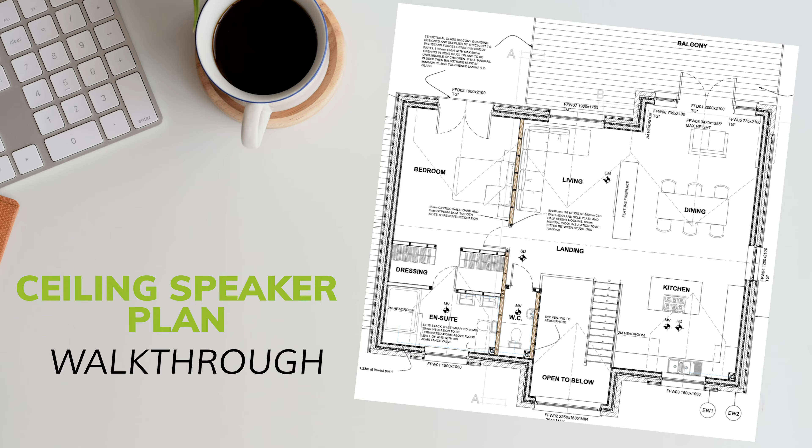So I've got an example floor plan here that is of a real client's proposed property, and I'll be speaking out loud my thoughts and recommendations for each room and give an explanation as to why I've recommended that. So hopefully you can learn a few things along the way.

From a general perspective, the client knew that they were after a Sonos system, as they were already familiar with how the ecosystem works and they'd like to continue with that. When you're looking to use ceiling speakers with Sonos, you'll need to power the ceiling speakers with Sonos amps.

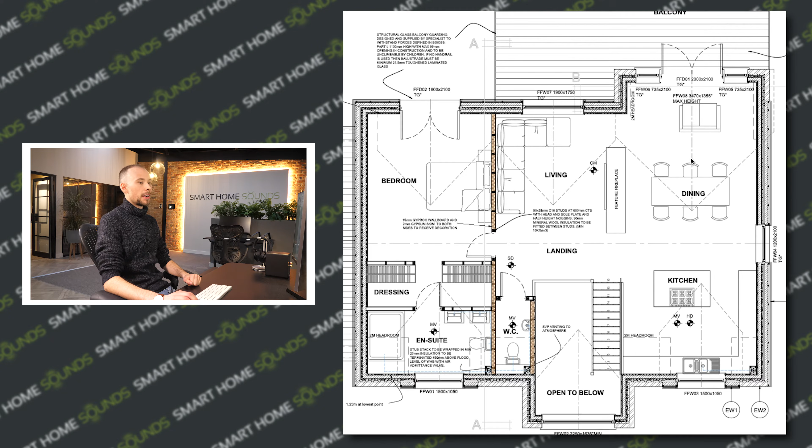So if we look at this open plan area here, you can see that it is sort of split into three different areas. For the majority of the time, we recommend having a dedicated pair of ceiling speakers for each area. For larger open plan areas like this, where there are different elements of the same room - like you've got a kitchen area here, you've got a dining area here, and you've got a little seating area here - we tend to recommend having a dedicated pair of ceiling speakers for each area, because how ceiling speakers work is that traditionally they're sold in left and right stereo pairs, so you normally buy them in pairs. And we tend to focus the positioning of each pair of ceiling speakers over the furniture, how the furniture is laid out in the plan.

So if we look at this plan, you can see we've got a little kitchen island here. So what I would tend to say is, let me just get my little blue circles out - I'll change that to blue, so I just love blue.

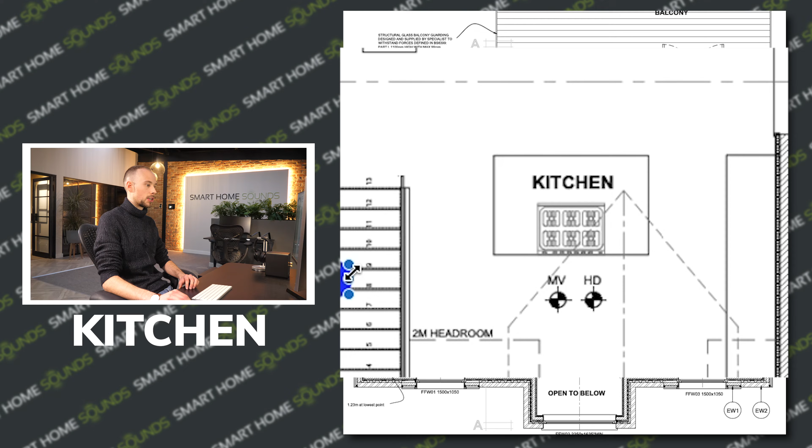Make that a little bit smaller. I tend to recommend positioning speakers just either side of the kitchen island if you have one. So I'd do one there, and I'll just copy that and put one the other side as well. That means whenever people are cooking, or maybe there are some bar stools, you'll always get a left and right stereo separation effect, which is handy because you'll be hearing different instruments and that sort of thing.

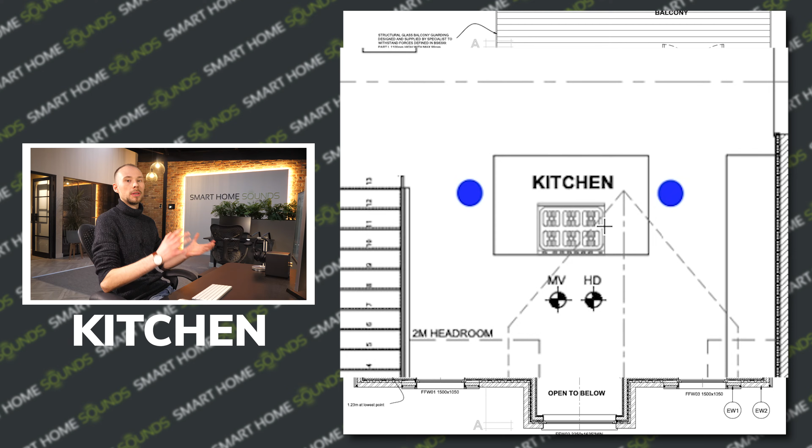So that's what I would do for the kitchen. Moving on to the dining room, it's quite similar to how the kitchen is. I'd recommend putting a speaker either side of the dining table, so the width of the table, so the majority of people, well in fact everyone, will be able to hear the left and the right equally. So it's going to be a little off center, but that doesn't matter too much.

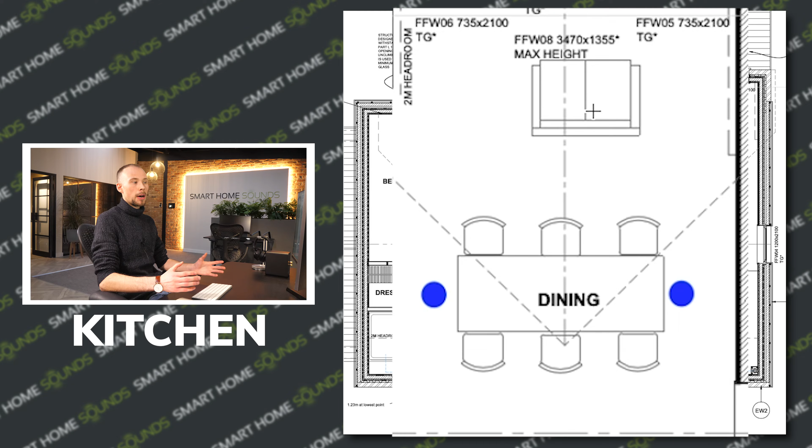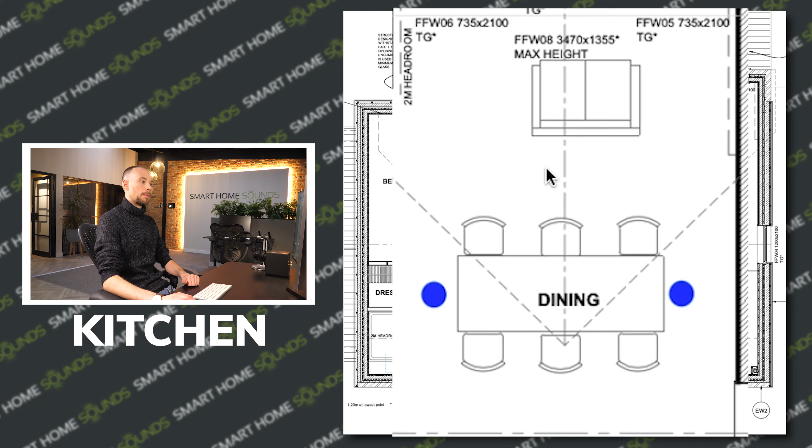The client didn't really need anything in the seating area. But what is good to point out is that if the client did want another pair of speakers here, you can run up to 6 Sonos in-ceiling speakers on the same Sonos amp. But if you use different brands of ceiling speaker on the same amp, then you're limited to 4 ceiling speakers. So that would have been a benefit. If the client wanted 6 ceiling speakers, Sonos ceiling speakers would potentially work out more cost effective, because they can put all 6 on the same Sonos amp without having to split it up into 4 on one amp and 2 on another. And the amps are $599 each after all.

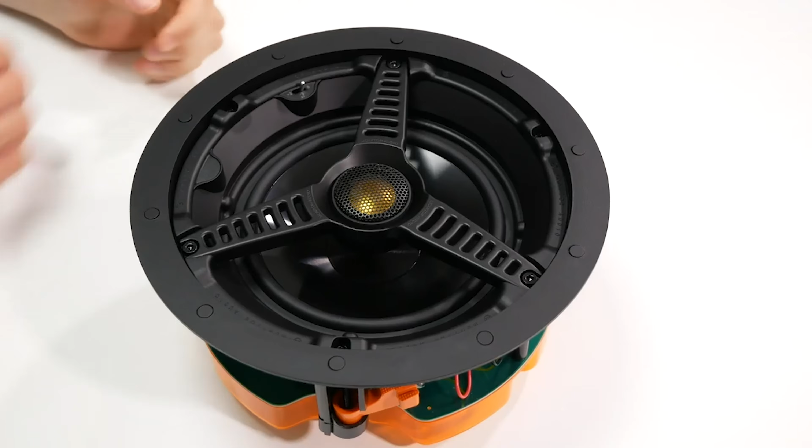Now this project actually contains a vaulted ceiling, meaning the ceiling is sort of like a V shape, so it's not flat. So I would have also mentioned to the client that Sonos in-ceiling speakers have the benefit of being able to offset the angle of the vaulted ceiling by pivoting the driver back down to the floor. Most ceiling speakers come with a pivotable tweeter, the little smaller circle in the middle of the ceiling speaker. That's usually adjustable, which if you can't afford the Sonos ceiling speakers is a good option, and I'd recommend looking for a ceiling speaker with a pivotable tweeter if you've got a vaulted ceiling.

So moving on to the living room now. We initially discussed the idea of having all ceiling speakers in the living room because the client has a TV here, just where the feature fireplace is. We discussed that while ceiling speakers are great for aesthetic purposes, when we're talking about TVs, they don't offer the best experience possible. Because all of the sound is going to come from above your head rather than at listening height, we tend to recommend keeping ceiling speakers for surround speakers, because they do make a really good job of being surround speakers.

With the TV, we normally recommend 99 times out of 100 to go for a soundbar because they are custom built for TV. You get more speakers built in, and the sound can be separated into different places. And of course, if you're talking about the Sonos Arc, you can unlock things like Dolby Atmos, and also get up to 5.1.2 surround sound. If you just went for an all ceiling speakers approach, the maximum you'll be able to get is 4.1.

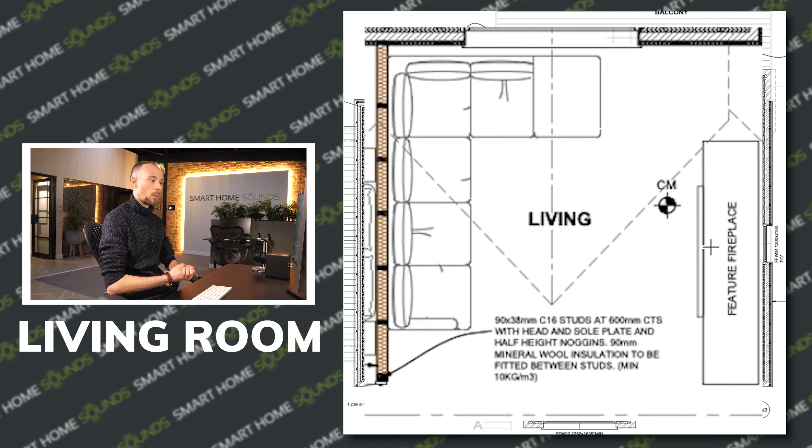So it was decided that we'd use in-wall speakers as the rears rather than in-ceiling speakers, because the sofa is quite backed up to the wall, and with in-ceiling speakers you'd have to put them directly above your head. With in-wall speakers it would be behind your head, which is a little bit better for getting the most out of the system.

You could optionally add a sub as well if you wanted to unlock some extra bass. The sub can just be plugged into mains power and it doesn't have to be connected to the Sonos Arc in any way. It will just talk to the Sonos Arc wirelessly.

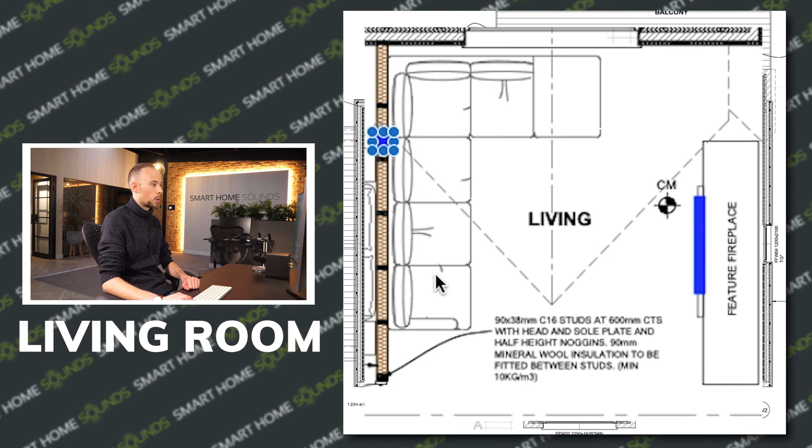So I'll just draw on the plan, just for the client's purposes, where the soundbar would go and where the in-wall speakers would go. I'll do a little blue rectangle there, and the in-wall speakers would be as central to the TV as possible. So you can see it's going to be a little bit off center because this L-shaped sofa makes it a little bit less optimal, but it doesn't matter too much. If mostly people are going to be watching from here, I wouldn't say that's an issue. So that's why I positioned it here.

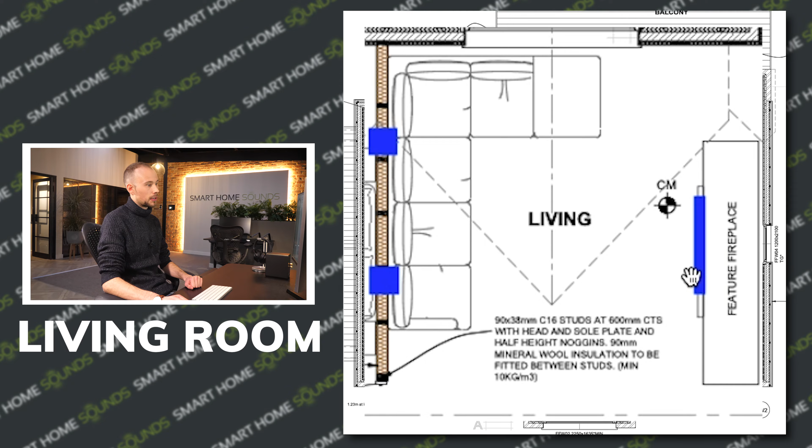And then again for the other side. You can see, in an ideal world, we'd want to make sure that the soundbar and the rear speakers are equidistant from each other at the right sort of angle. You don't want it like that, where the right in-wall speaker is now into the edge of the TV. You want to make sure it's equidistant.

Moving on to the bedroom now. It was discussed whether we would just go for a Sonos Beam in here rather than a pair of ceiling speakers. We did rest on the idea of having a Sonos Beam only for the TV because not only is it more cost effective, the client's only going to be using the bedroom for TV really. Ceiling speakers aren't really entirely necessary, and they didn't need that aesthetic.

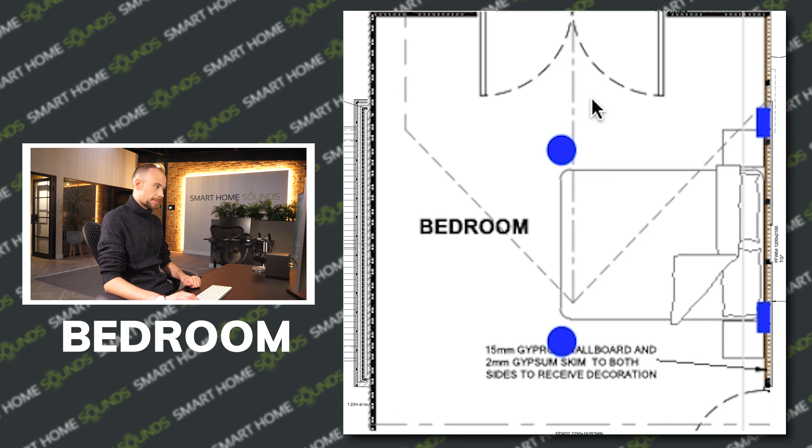But if we took the example of using ceiling speakers, just so I can show you guys how it would work, we'd normally spec them up and position them at the foot of the bed, either side, because that means 9 times out of 10 the ceiling speakers will end up being central to the room and fill it in a nice balanced way. So that's how it would look if I was putting ceiling speakers in there.

And then the client looked into the possibility of having one in the ensuite as well. So this is where things get a little bit more tricky, but don't worry, I'll explain. Going back to the idea of all ceiling speakers being sold in pairs, there are some ceiling speakers out there called single stereo ceiling speakers.

For any rooms that are not practical to have a pair of ceiling speakers in, because they're simply too small and you won't have the ceiling space for them, we tend to recommend the guideline of making sure they're positioned at least 2 meters apart from each other to get the optimal stereo separation effect.

If it's going to end up being less than 2 meters apart, we tend to recommend just going for a single stereo speaker - that's a single speaker that can still output a left and a right channel. So you're still getting a stereo separation effect, just a lesser degree. But it works out much more practical in a smaller area, such as an ensuite.

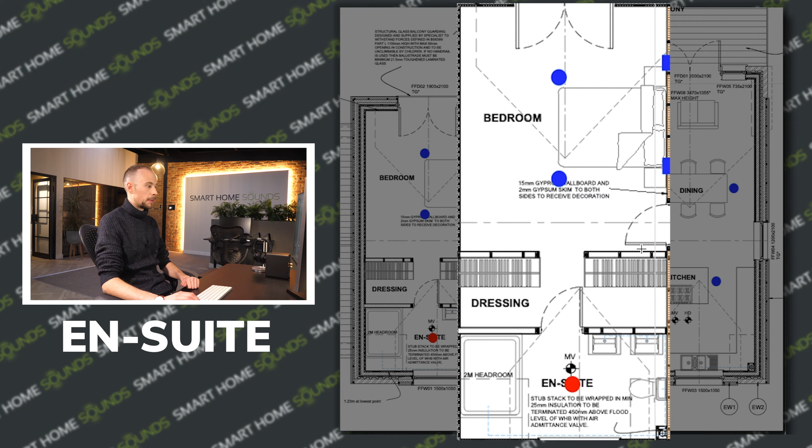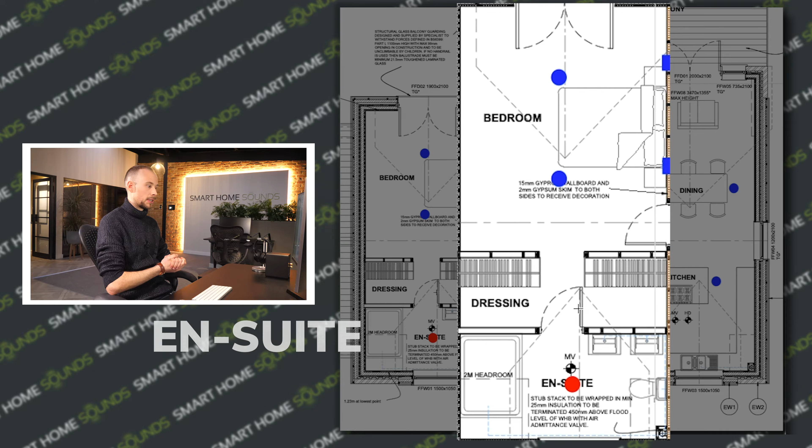For the purposes of the plan, what I would normally do is make that circle a different color so you know that's a single stereo speaker. A really important thing to bear in mind is that single stereo speakers will still require 2 cables to be run to that position, because just like a pair of speakers, they have a left and a right. So I've just put it in a central position in the ensuite for now, but you can change that if you wanted to.

The main critical point is that if you're planning to have a ceiling speaker within a shower enclosure or directly above a bathtub, you will need to make sure that speaker is waterproof rated - so it has an IP rating, with something like IP44 probably the minimum I'd recommend in an ensuite. That's just to cover you for moisture, when it's close to a water source.

If it's just going centrally like we have here, then as long as you've got appropriate ventilation, extractor fans, and open windows occasionally to let the air circulate, any normal single stereo ceiling speaker has a degree of steam and moisture resistance in it. So you shouldn't experience any rusting or discoloration over time - it should stand the test of time just by going for a normal ceiling speaker there.

So that's why, by keeping the cost down, we can quote for a normal single stereo speaker in the middle of the room there. Another point about the bedroom and ensuite: the client didn't necessarily need the ability to listen to different music in the bedroom versus the ensuite at the same time, so we could quote for the bedroom ceiling speakers and the ensuite ceiling speaker on the same Sonos amp.

So that saves us having another Sonos amp, and that would just be called bedroom/ensuite in the Sonos app when you come to name the room.

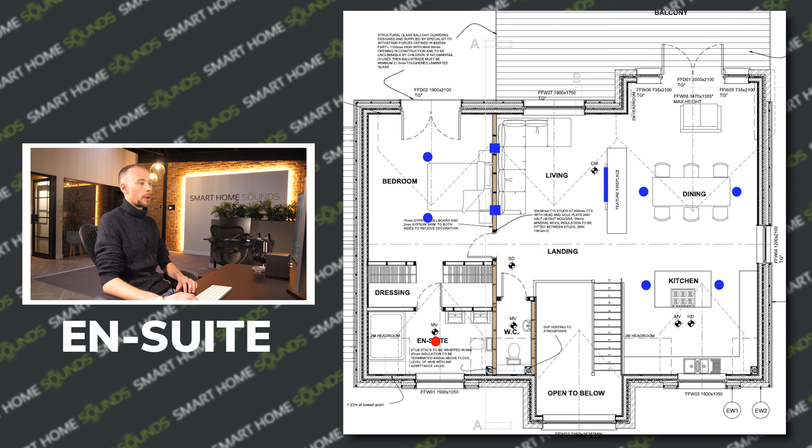So here, that's where we'd normally have that conversation - would you like the ability, at least, to turn off the ensuite to the bedroom - and then we'd quote for a speaker switch if you wanted to do so. That just sits in between the Sonos amp and the ceiling speakers in terms of wiring.

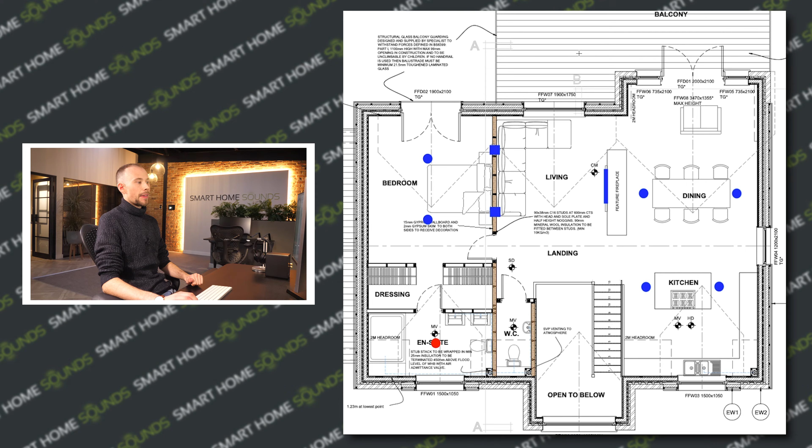Okay, and then the last zone we had was the balcony. So we've got quite a nice open space here for the balcony, and there's a couple of options if you wanted to get outdoor audio.

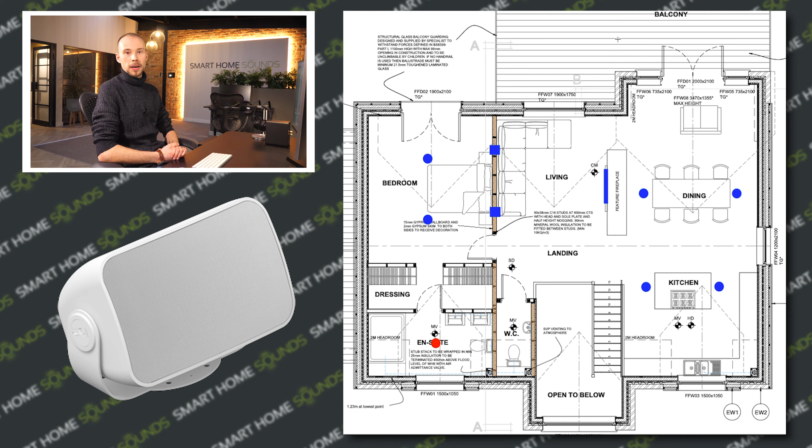The first option is to have a permanent wall-mounted zone. That means you'd have another Sonos amp and a set of wall-mounted speakers which are fully weatherproof, so you can keep them wall-mounted outdoors all year round. Sonos do their own outdoor speakers, optimized for use with the Sonos amp. Unfortunately, you can't do Trueplay on Sonos outdoor speakers because it can't regulate for the outdoor environment. It would be cool if they could, but they don't.

So you've got that option, and that would be a stereo pair - like ceiling speakers, a left and a right outdoor speaker. For the purposes of this quote, I'd probably position them either side of these double opening doors here, so they'd sit there, and then another one over there. But of course, if the table was going to be over here somewhere, you might want to put them in these corners. It's entirely up to you - this is just rough at the moment.

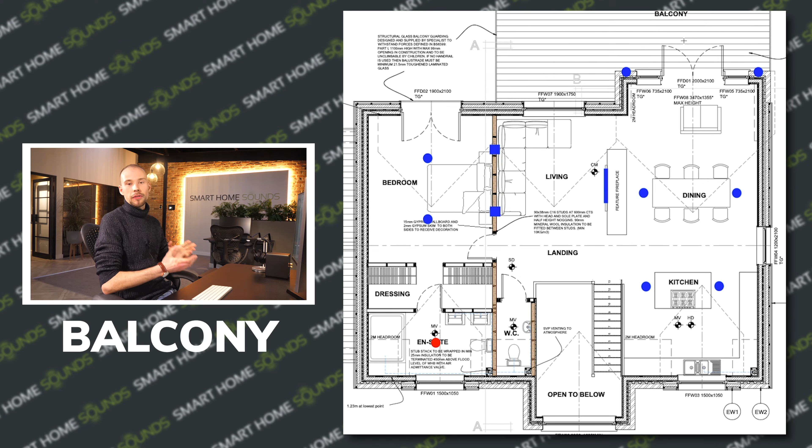So there's that option if you wanted a permanent outdoor solution. If you didn't want to invest in another amp and another set of outdoor speakers, Sonos do the Sonos Move, which is a fully portable, weatherproof wireless speaker that's battery operated. You can pick it up from its charging dock, and it's got about 11 hours battery life. You can move it from room to room, and because it's weatherproof, you can take it outside and it will fully withstand all kinds of weather. I think it's IP56 rated, so it's really well protected against that sort of thing.

Because the Move is only $399, and the amp and outdoor speakers would come to, well, $599 for the amp and $799 for the outdoor speakers, you're talking about $1,400 there. So it's quite a difference, but it depends on whether you want a permanent outdoor solution or whether you're just happy to pick up a portable speaker.

And of course, you don't even have to consider the Sonos Move - that's only if you want to integrate it with the indoor zone. If you want the ability to have audio playing on the Sonos Move whilst you're outside on the balcony and also in the dining kitchen area when you might be having a party, that might be really useful to you. But you could just have a standard portable Bluetooth speaker - it could be like a Marshall Emberton or a little JBL. It's entirely up to you.

So there are plenty of options for outdoor audio. It all depends on what you want.

Obviously I've talked a lot about Sonos in this project because that's what the client was specifically after. But there are plenty of other options available, like multi-room options if you did want to look into those. Now what we would normally say is if you asked how good Sonos compares with other multi-room brands, we'd say of course there are other options available, but in our experience, we just find that the Sonos app is a little bit more refined.